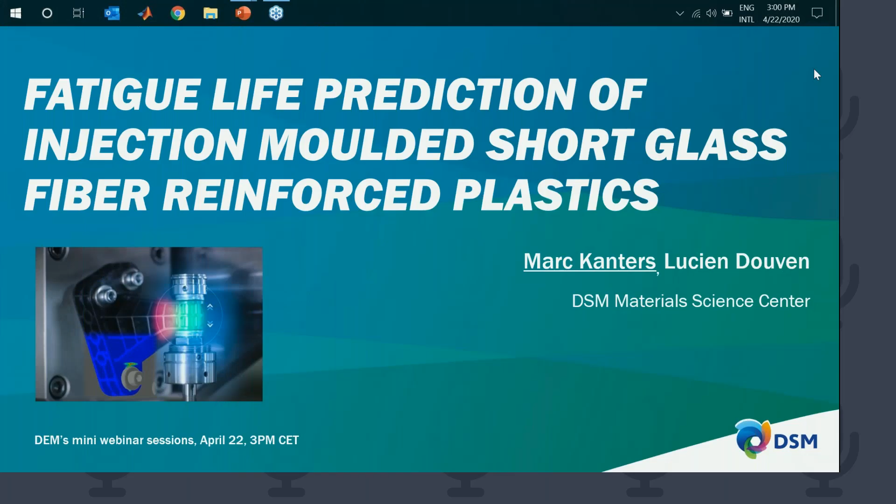I'll be your moderator for today's webinar on fatigue life prediction of plastics.

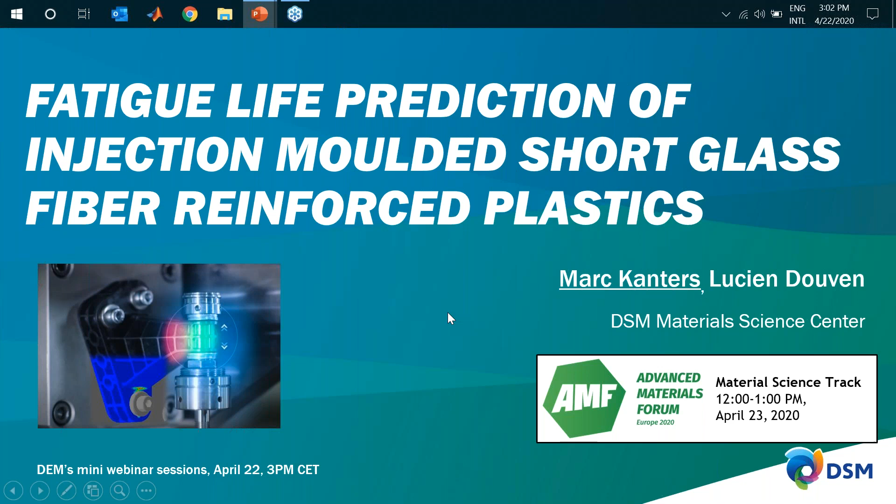The outline of the presentation for today is that I will first start with an introduction and also provide you with a motivation why a material supplier is bothering doing this kind of work. After that, I will try to show you some details on the fatigue framework that we developed to predict the fatigue lifetime of short fiber reinforced plastics.

So that involves some details on material characterization and some highlights of the material model that we use, incorporated in DIGIMAT. Eventually, we also need to correct for stress gradients, so I will demonstrate how we do that, and I will illustrate the issue that the force ratio is not necessarily equal to the stress ratio. Then we will demonstrate this entire framework on a validation case, and I will also discuss some recent improvements.

The nice thing is that this entire framework was now also implemented in the commercial DIGIMAT software. There was a collaboration project between DSM and E-XSTREAM on implementing this workflow, which also allows you as a customer to use the learnings and insights that we have and perform structural simulations yourself. After that, I will conclude and provide you with some outlook, and then there's some room for questions.

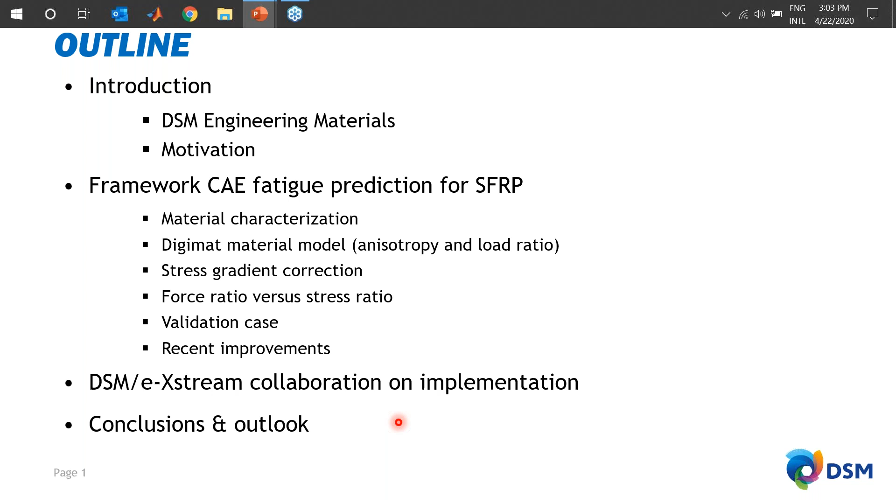So first, introduction. For those of you who don't know DSM Engineering Materials, formerly known as Engineering Plastics, we are one of the key material suppliers in automotive and electronics. We dare to say so because you can find our materials in 87% of all cars. The reason is simply because we have a very broad portfolio with a lot of different materials that are suitable for different applications.

If you look on the right, we have this typical pyramid of polymers. On the left, you can see the amorphous polymers, on the right, the semi-crystalline ones. If you go from bottom to top, you go from typical commodity to mid-range to eventually high-performance plastics. You can see that DSM has a very broad portfolio of different materials, all based on different semi-crystalline matrices, and therefore our materials come back in a variety of applications in these cars.

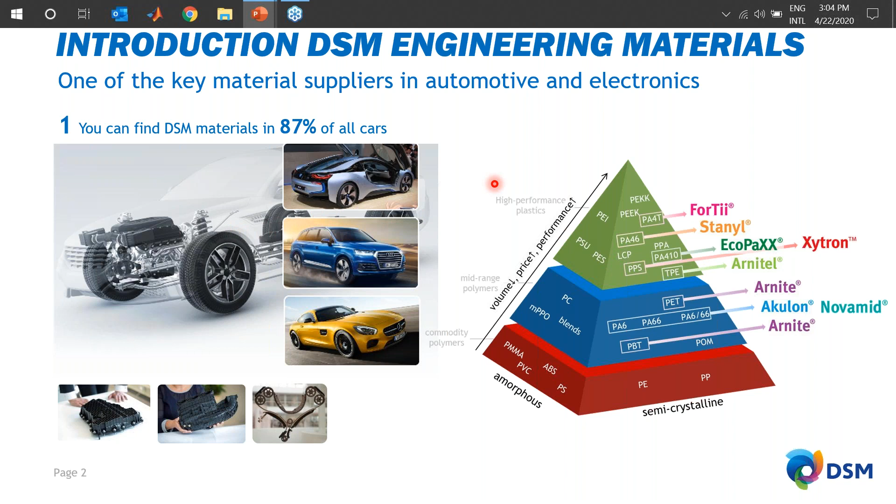The ones that I'm discussing today are mainly these high-performance plastics that are applied in the more demanding or more load-bearing applications in these cars. And that also brings me to the motivation of this work.

Because you can imagine that a lot of the market trends are replacing metal by plastic. That is mainly driven by this continuous drive for lighter vehicles. And here we use the motivation of the reduction of CO2 emissions that is forced by, in this

case, European legislation. So as you can see over here, we have the CO2 emission target plotted over the different years. You can see that the emission target was continuously reducing over the years, and the target for this year is even more ambitious than the reduction that already was achieved for 2015.

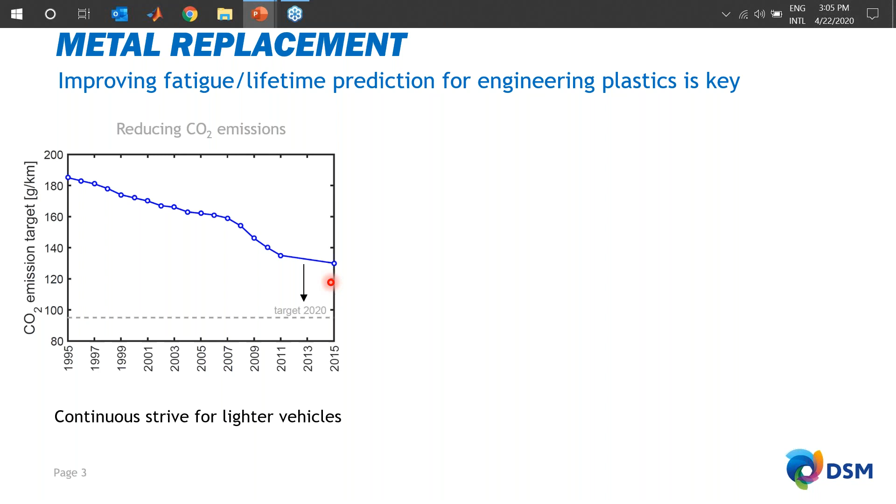And you can imagine that you can reduce these emissions by making your car more efficient or improving the combustion process. But a fairly easy trick is also to reduce weight, then you also reduce the emission. When you're going to reduce weight, then you can typically think of replacing the typically heavy parts that are made of metal by plastics. And if you do so, you usually start with simple parts where strength and stiffness usually suffice. So think of covers and heat shields.

But once all of these are already replaced, then you also have to move towards more demanding parts to still achieve weight reduction. And then you can think of thermal management modules or powertrain components, or perhaps even body and chassis. And with this increasing part complexity, you can also imagine that the loads are becoming more demanding, and therefore also the significance of durability increases.

So in order to be successful in these demanding load-bearing applications, you also need to be able to do proper computations and proper part design. And that's where DSM said, okay, we need to make a step up here, because we would like to help our customers in being able to make more reliable predictions and better design approaches. And that's why we said we want to invest time and R&D efforts in improving the fatigue predictability of this class of materials, and also building a tool that is enabled for our customers.

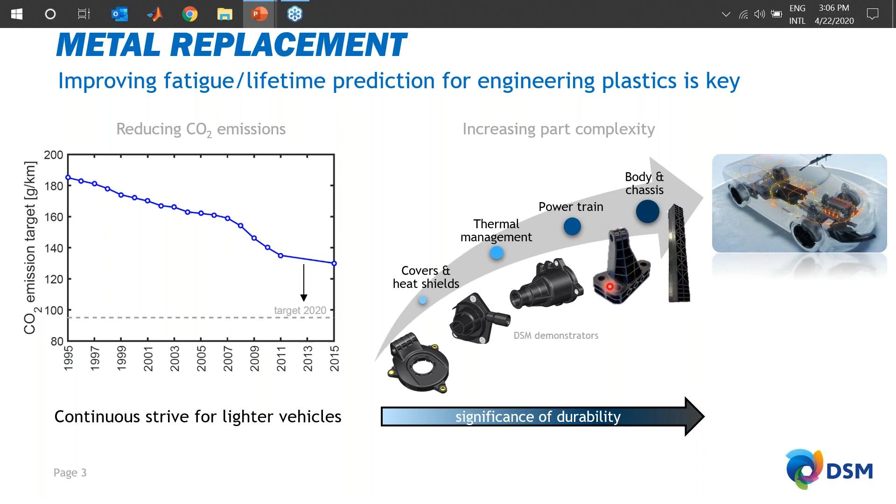So that brings me to an introduction of myself. As you probably know, my name is Marc Kanters. I work at the corporate R&D department. These longer term R&D activities are usually executed at the corporate R&D department for the materials cluster, which is called the DSM Materials Science Center, and is based in Geleen, in the south of the Netherlands.

Prior to joining DSM, I obtained a PhD in mechanical engineering from the Eindhoven University of Technology, and I have expertise in polymer mechanics and lifetime prediction of thermoplastic composite materials. I have mainly an experimental background, and that's why we also teamed up with Lucien, who has a strong simulation background, and I think that we were complementary in developing this framework.

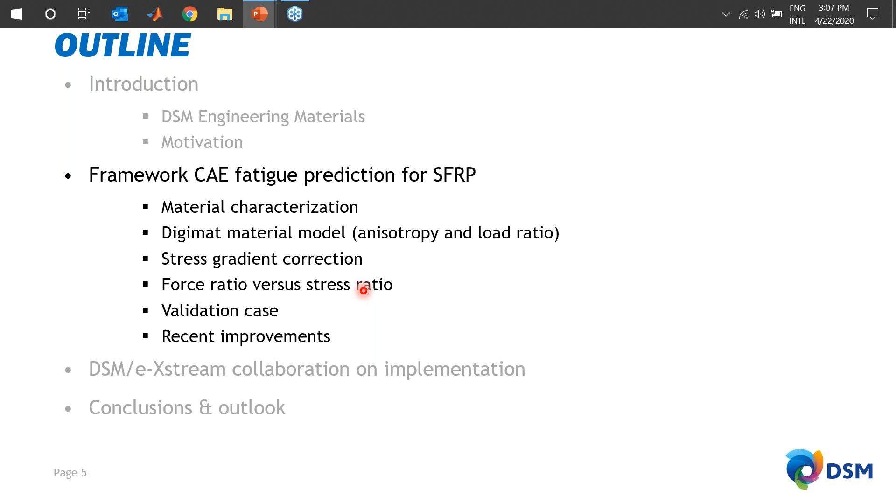But if you have the fatigue data, you have to convert this into a material model. And here we use the DIGIMAT fatigue material model that basically calibrates your material strength in different directions to predict also the anisotropic performance. To do so, you need to have some information on the microstructure. So you do CT experiments to measure the glass fiber orientation that you can use as an input for

the DIGIMAT material model. The nice thing is, if you know what the microstructure is that resulted from some kind of injection molding process, you can also use that to tailor the properties of your flow simulation to enable better fiber orientation predictions when performing a mold flow simulation on your part.

And once you know the orientation in your part and you have the material model, you can compute the stresses in a part. If you have the part prediction, then what you will find out is that especially in highly stressed regions, there's an effect of stress concentrations which you have to correct. So this notch sensitivity has to be calibrated and also taken into account, as we will demonstrate in a second.

So I will try to go step by step, highlighting some of these parts. The flow simulation I will skip. In case you want to hear more about that, you can join the call from Lucien tomorrow or contact me after this call. But I will try to give you a glance of all these ingredients in the fatigue framework.

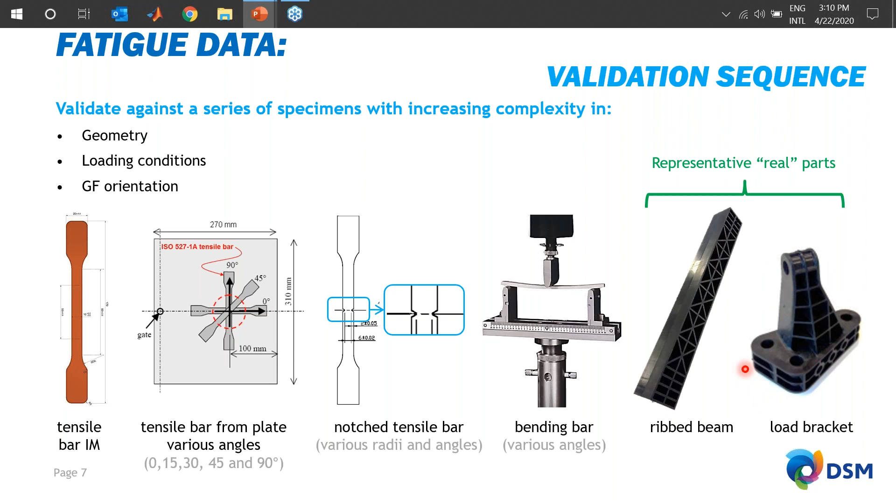And if you look at the typical results, I think what we do differently is that we actually recognize the fact that you have multiple failure mechanisms. So some of you might be aware that if you plot the SN curves, so the stress versus the lifetime, then you might see two different regions. So you have one region which is plasticity controlled and one region which is crack growth controlled at longer times and

lower number of cycles. But if you then play around with amplitude, which is captured by this so-called R value, so the minimum load divided by the maximum load, you can imagine if this R value is equal to 1, you just have a static load since both loads are equal. And if this R value is decreasing, you gradually increase the load amplitude. But if you do so and you look at the fatigue performance, then you see something nice appearing.

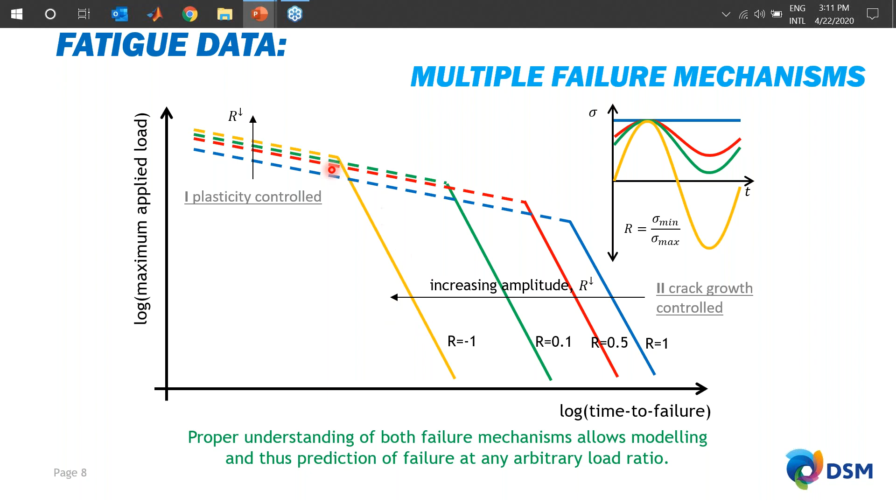Because for this plasticity controlled region, you see an increase in lifetime with decreasing R value or increasing amplitude. And at longer lifetimes and lower loads, you see the steeper region actually shifting towards lower lifetime. So for the crack growth controlled failure, lifetime decreases with increasing amplitude or decreasing R value. So that's a bit counterintuitive, but if you recognize that these two mechanisms are there, you can also properly model these. So if you have proper understanding of both failure mechanisms, then you can also better predict failure at any arbitrary load ratio.

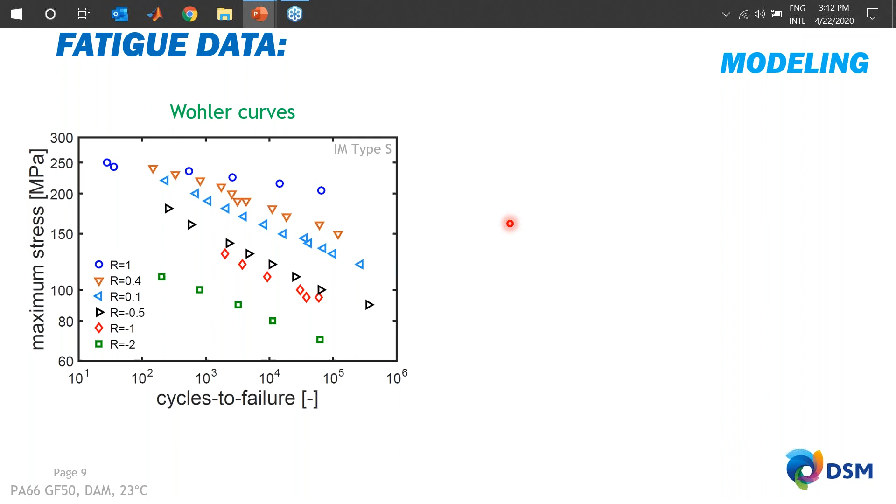And to demonstrate this, you can see here now the fatigue data that we measured on this polyamide 66 50% glass fiber. You can see the maximum load versus the number of cycles, so the typical SN graphs, for R = -2 ranging up to R = 1. So let's say creep rupture up to a very large tension compression load. And then if we compare our models calibrated on these data points, you can see that our models describe the experimental data points very well. Logical, because we also use these to calibrate the material model.

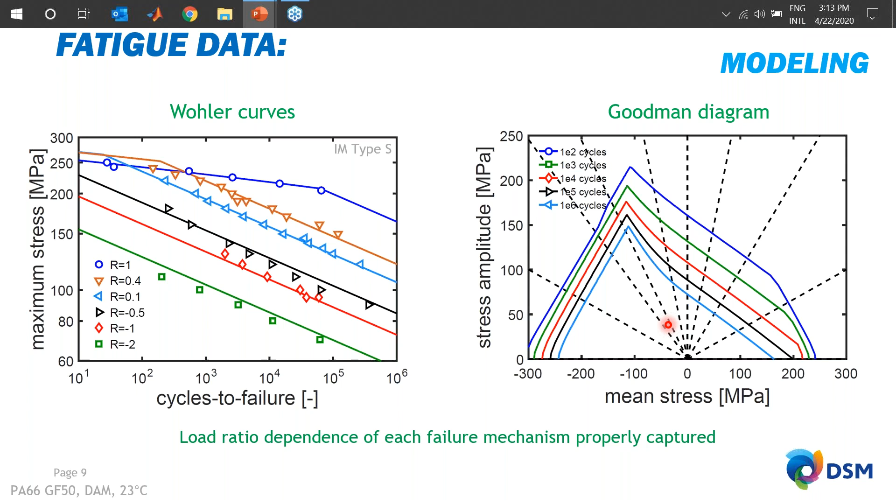So this was a glance at how we treat, let's say, our fatigue data. You can imagine that now I demonstrated this for R value dependency, but we also do something similar for anisotropy. We studied both the influence of glass fiber orientation and R value for that. And these details we can now feed into a material model.

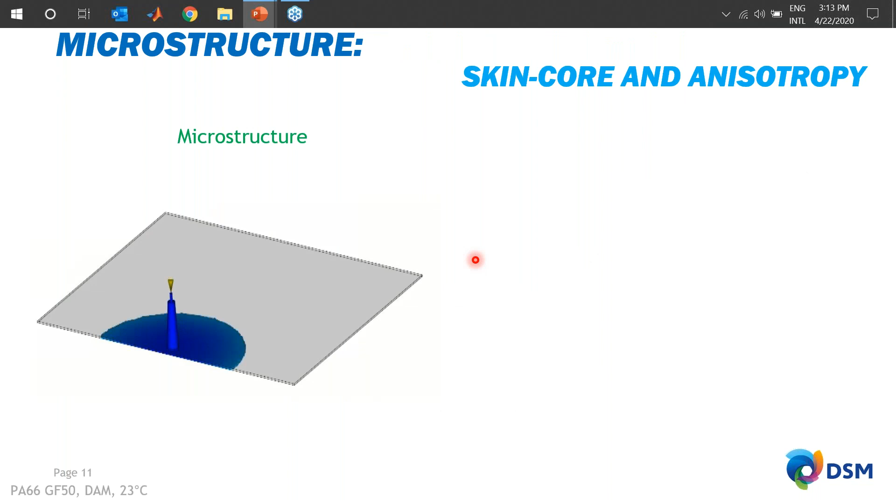So first, before we can go to the material model, you have to understand what the microstructure of this plaque looks like. Because since this plaque is injection molded, you can see initially you already have some kind of biaxial stretching in the beginning. And in the end, you have the shear flow because of filling the remainder of the plaque. So as a result, you can imagine that at the edges, you have highly oriented fibers because of this flow. And in the middle, you have more or less perpendicular oriented fibers to the flow because of the biaxial stretching.

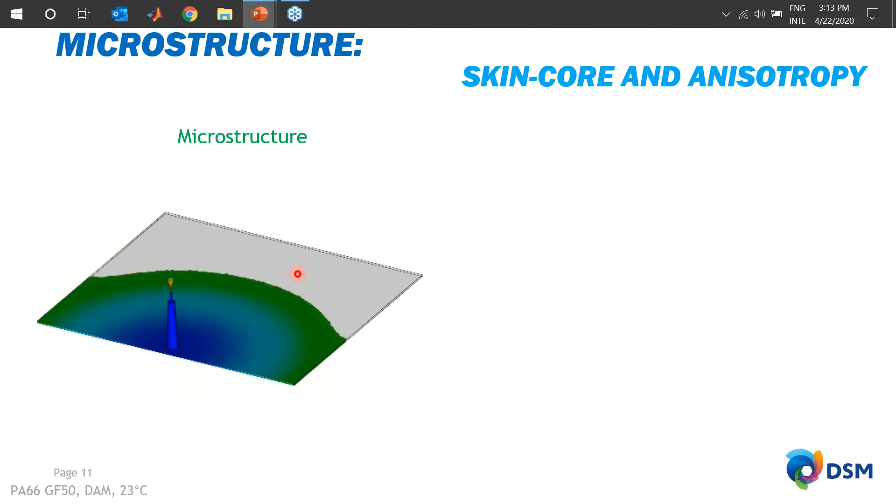Then you can see that in the 2D plane, so basically in the plane of the plate, you have a very pronounced skin core morphology because of the edges. So let's say on the outside, you see that you have highly oriented fibers, and in the middle you have perpendicularly oriented fibers, and of course it's symmetric because you have the edges on the other side. So you have to take this into account because as a result of this pronounced skin core structure, you also get a very anisotropic material behavior.

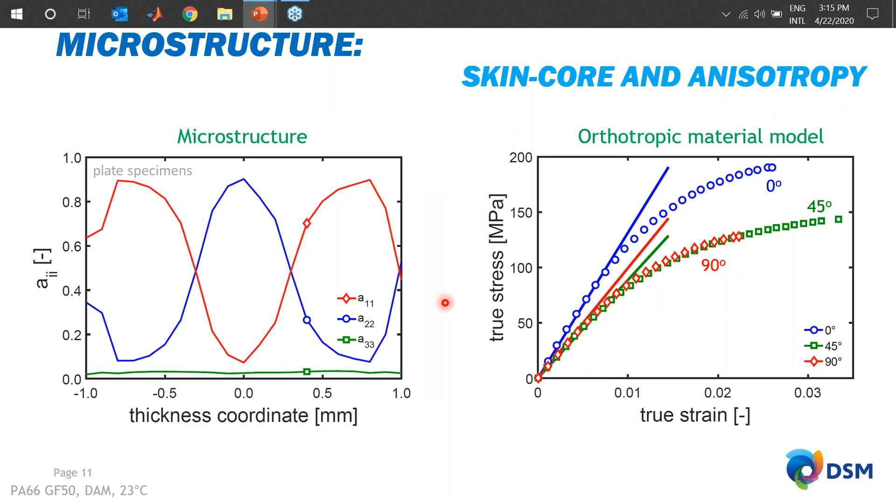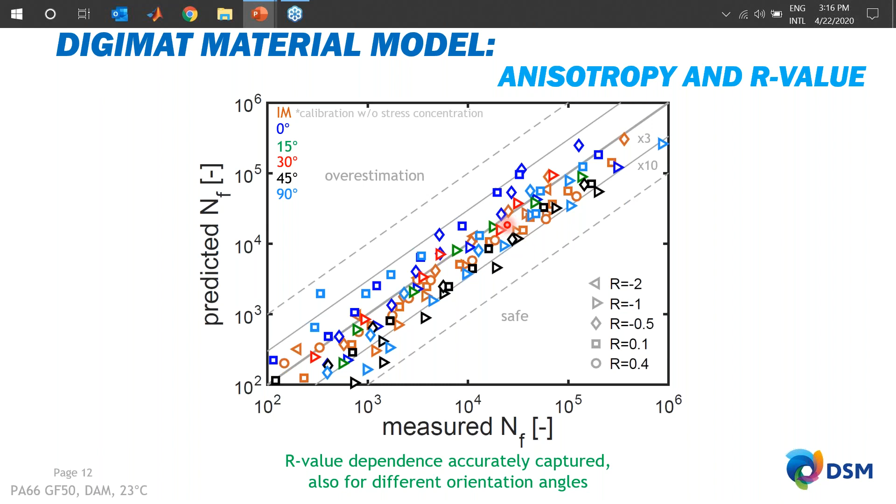So hopefully that gave you some idea about the DIGIMAT material model that is used, and also about the microstructure that you see and the influence of that. The next step is now to zoom in on the stress concentration correction.

But this is something which is known, and that's why we decided, okay, let's just do the things that they also use when they try to predict fatigue for metals, and that is to correct for, let's say, these fatigue notches. So you can use a support factor or the fatigue notch factor to compute an effective load by scaling down the maximum local stress. And we decided to use the theory of critical distances, which uses the normalized stress gradient. So how fast does the stress decay on a path perpendicular to the maximum principal stress?

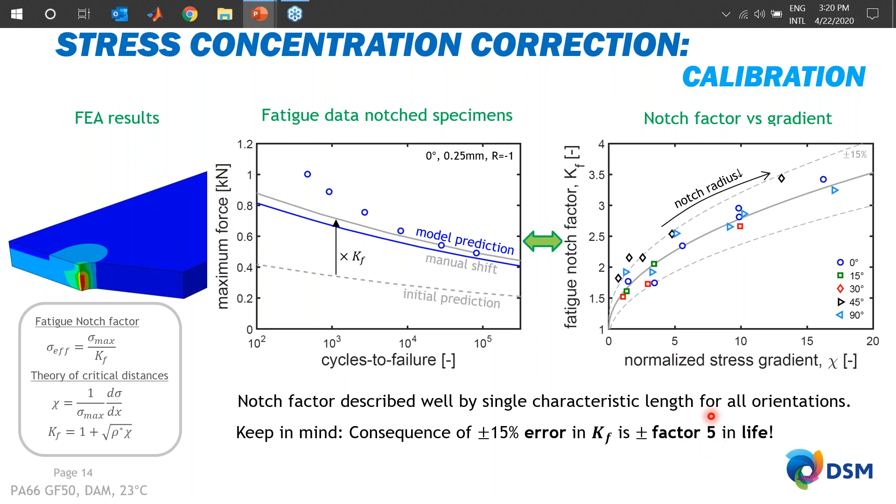But one consequence, of course, is we are scaling our local load. You all might appreciate that the lifetime is very sensitive to stress. That means that we have to take into account that this plus minus 15% is actually also plus minus a factor 5 in life that we introduce. But nevertheless, with that framework, as you can see over here, the measured versus predicted lifetime describes the lifetime for a huge range of notch radii and a lot of different orientations very well. So we introduce a bit more error, but again, we can describe the lifetime of notched specimens reasonably accurately.

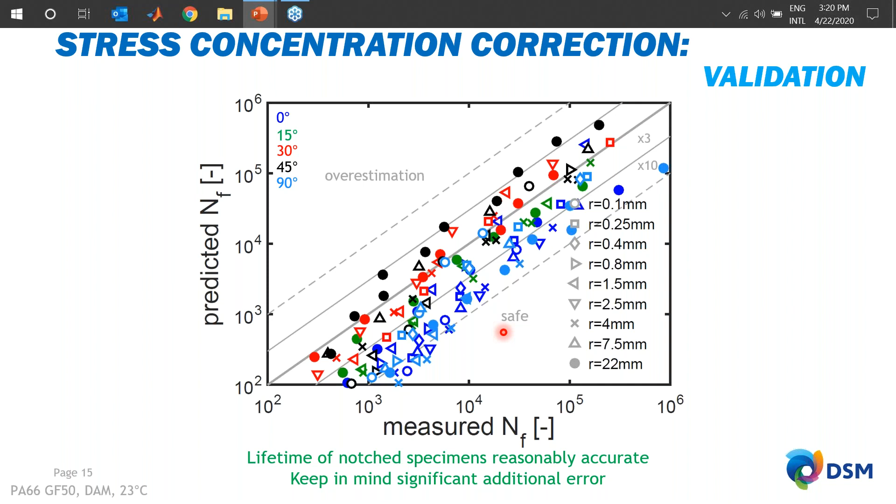So now I hope I also tackled a bit of the stress concentration. The flow simulation I can unfortunately not tackle today in view of time. So the next thing will be the part prediction. Because as I mentioned, we are eventually validating our prediction on this demonstrator part. So here you can see a movie where we load this part in fatigue, and that means that we apply a certain R value and force. It ranges from the minimum force divided by the maximum. I try to go for a large range of R values, ranging from 0.5 to -2, and then we end up with these kind of SN curves.

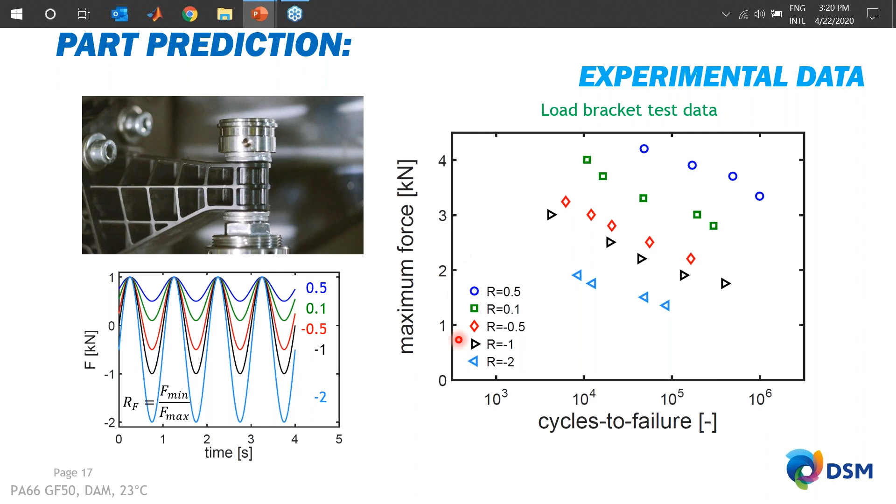So you have the maximum force versus the cycles to failure. The nice thing is, as you might see from this part, that it's asymmetric. So you can imagine if you push with a certain force or you pull with a certain force, that you get some kind of localization of the failure location.

So if you go to R = -2, which means that you push twice as hard than that you pull in the maximum load, then you see a failure location here on the bottom. But for all the other ones, where actually the R value is bigger than -1, that means that you pull harder than that you push, then you always see failure on the top. And this was also correctly identified by the framework.

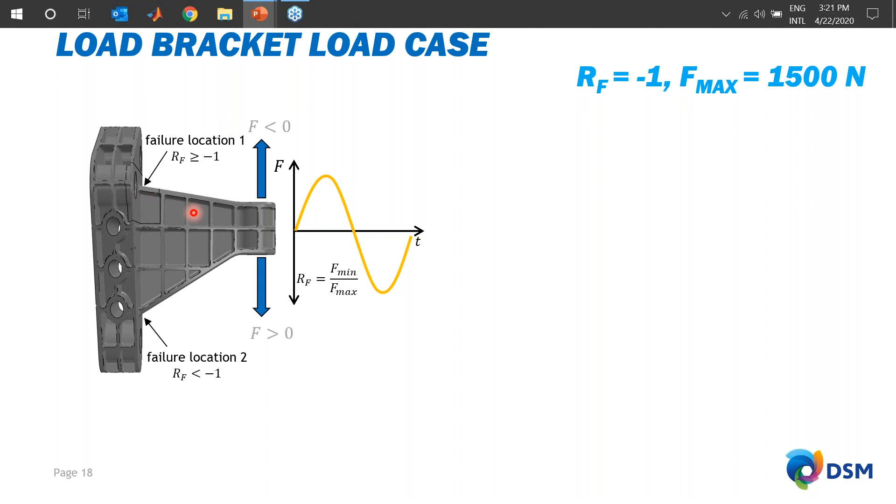Then the next thing what you can do is, besides looking at the failure locations, looking at the stress levels. And if you do so at, let's say, a load of 1500 newtons, if you push with 1500 newtons, you end up with a compressive load here on the top of -34.3 MPa. But if you then look at the stress levels in the same region when you pull with 1500 newtons, then you can see that the load is much higher.

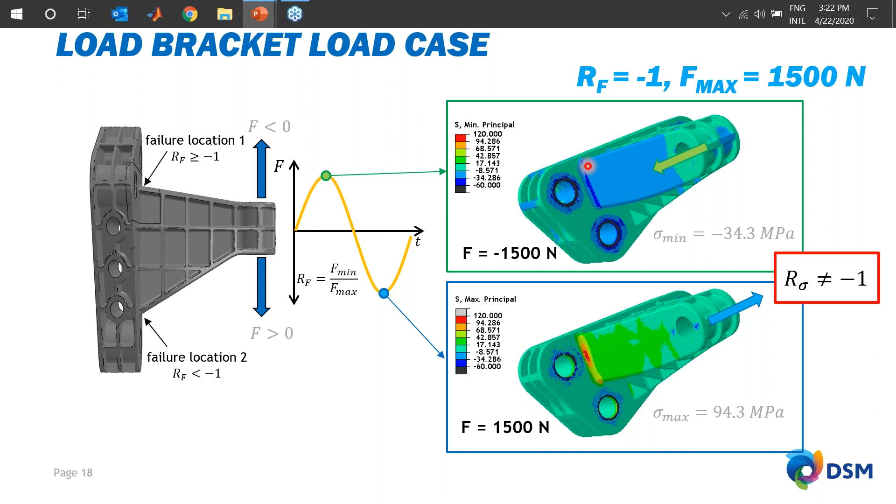So it's 94.3, partly due to this anisotropy and partly due to the fact that you have boundary conditions because of washers that are applied while applying the bolts. So that means that we apply a certain force ratio which is equal to -1, but the local stress ratio is far away from -1. It's actually only -0.4. So that means that you really have to take into account the local stress ratio to do proper fatigue calculations, simply because the local R value is really affecting the lifetime.

But if you do this properly, then we end up with a certain part prediction, as you can see here in the middle, where we again plot the measured lifetime versus the predicted lifetime for all these different R values. And what you can see is we were a bit disappointed. We are underestimating somewhere between a factor 5 to a factor 30 for most R values. But what you might appreciate is that although the lifetime is drastically affected by the R value, we seem to properly capture this because everything is located in the same cloud.

And besides that, you can also see that the lines here are parallel to these gray lines. It also suggests that the force dependency, which is again also affecting the local R value, is also captured well. So although we wanted to do a bit better, we were already quite satisfied with this result after analyzing it properly. So in conclusion, we can capture the failure location, and we are slightly conservative, but we can already predict within a factor 5 to 30, and we can properly capture the R value.

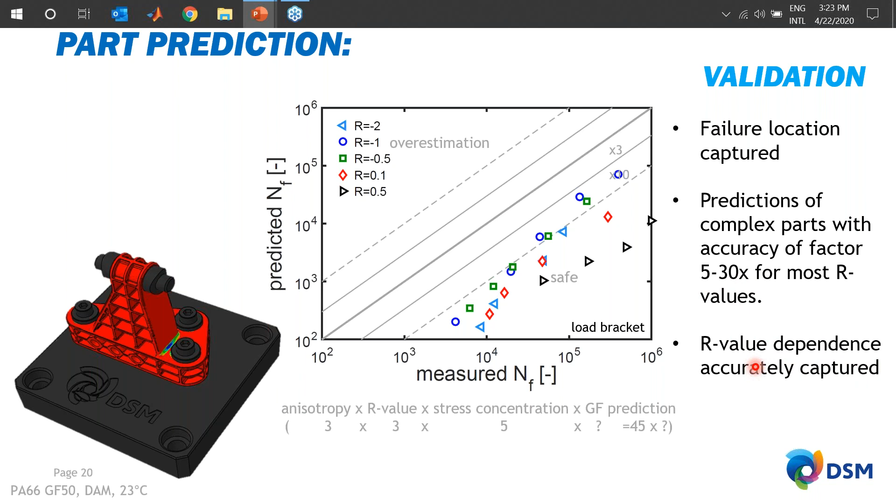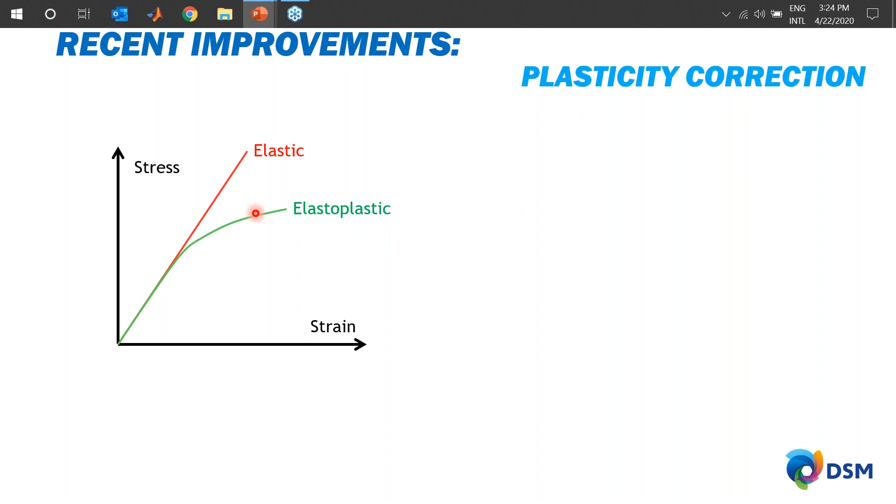So I hope that it also gave you a glance at the part prediction capabilities. Next step would be to discuss some recent improvements. Because you might already have noticed that I mentioned that we do linear elastic computations. So especially at these high local stresses, you will start underestimating the performance because you will follow this red line, where in reality the material will yield and follow this elastic-plastic behavior.

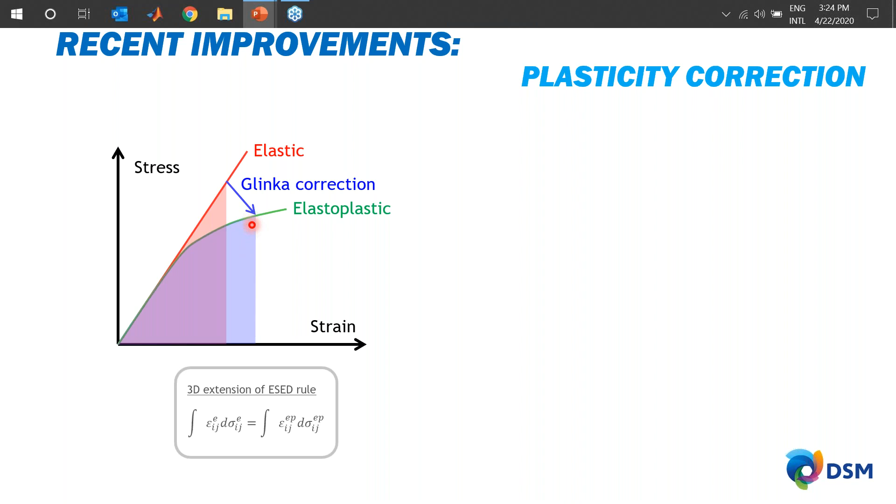This can be solved because you can correct for that by, for example, using the Glinka correction, very similar to the Neuber correction, as you might be aware of, where you use the elastic strain energy density and look for the equivalent one in the elastic-plastic range to knock down your local stress levels. And this brings us to the advantage of using Digimat, because the colleagues from Digimat are very good at predicting the elastoplastic material performance for a lot of different fiber orientations.

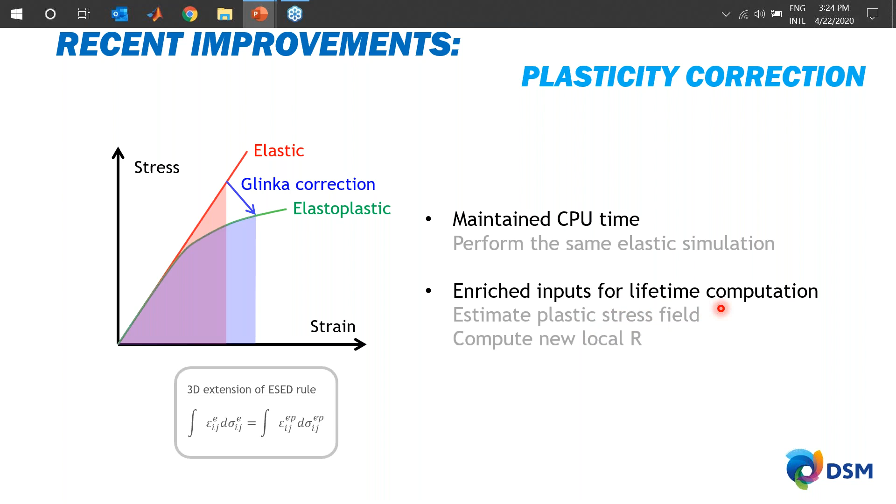And they can do it so efficiently that they have a hybrid option to only do this for, let's say, the elements that exceed a certain yield stress. And with those as input, we compute the plastic stress field and also compute the new local R.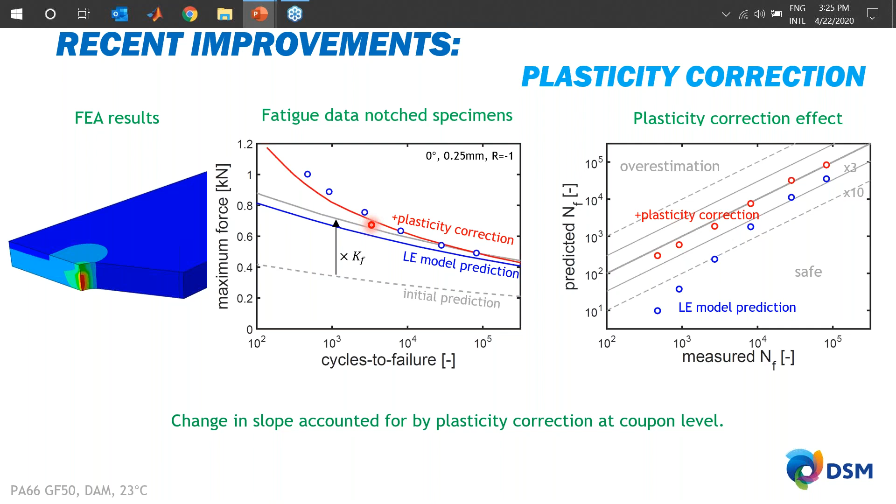And the nice thing is that if you then also do this on parts, where the initial prediction was between this factor 5 to 30, actually locally this high local stress already results in yielding. So if you then compare it with the new prediction with plasticity correction, you can see that all these points shift into this factor 3 type of range. So the predictions of these complex parts are well within this decade. So we're really happy to see this.

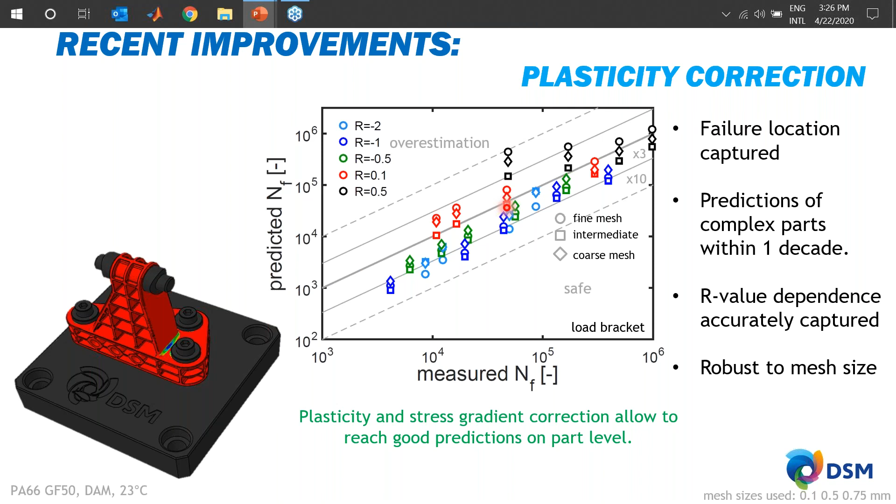And it also tells you that if you combine a plasticity controlled failure with a gradient correction, you really achieve targeted results, which we set within a factor 10. And the nice thing is that this approach using the gradient and plasticity is also robust to mesh size. So here you can see the results for 3 different mesh sizes, all consistent, which is also convenient. So you don't have to recalibrate the model when you start changing the mesh density.

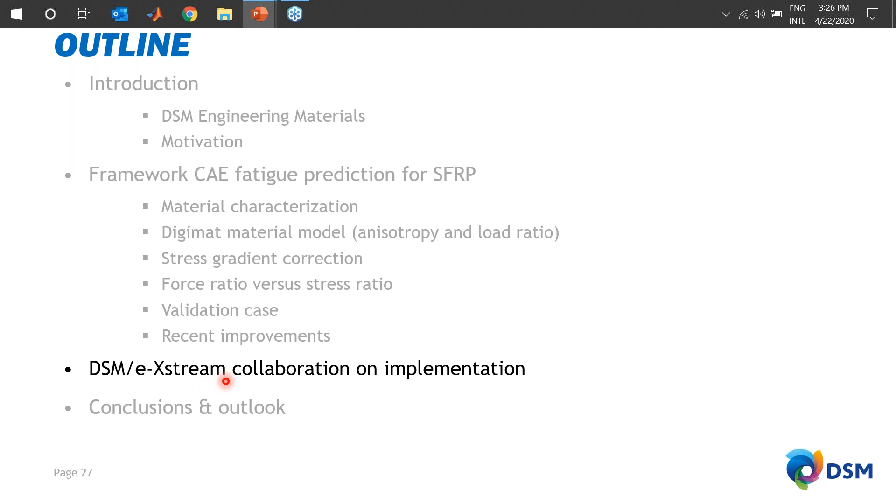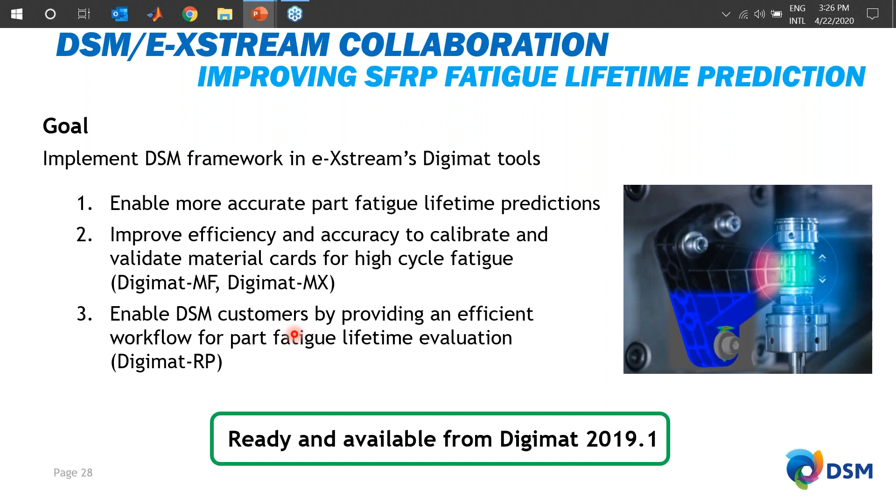The reason why it might be of interest to you is that we had a collaboration with E-XSTREAM, the company behind DIGIMAT, who also implemented this workflow. Our goal was to enable you to do more accurate fatigue lifetime prediction at part level, to simply enable our customers using our material cards. And it's ready and available from DIGIMAT 2019.1, even including the plasticity correction.

And that means that you have a post-processing tool to compute your local lifetimes. And we also supply 2 different material cards, polyamide 66 and PPA, both with 50% glass fiber, that are now available, albeit on request, to perform structural analyses.

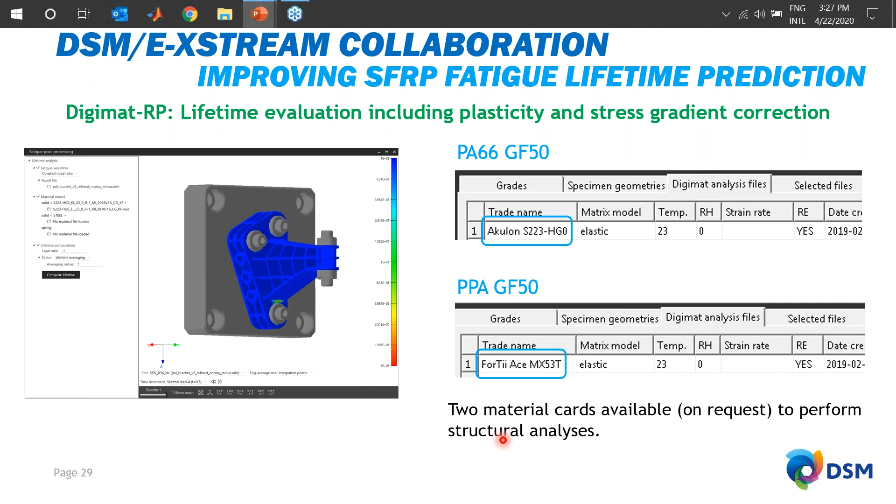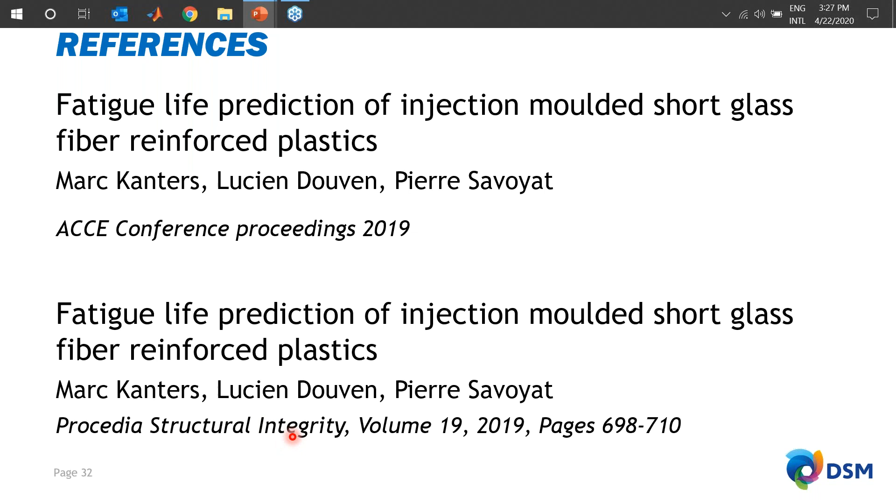So in case you want some references, we published a majority of this work in 2 different papers. But please reach out if you want to know more. Please be aware of the time slot tomorrow for my colleague, who will present this in more detail and probably at a bit lower pace.